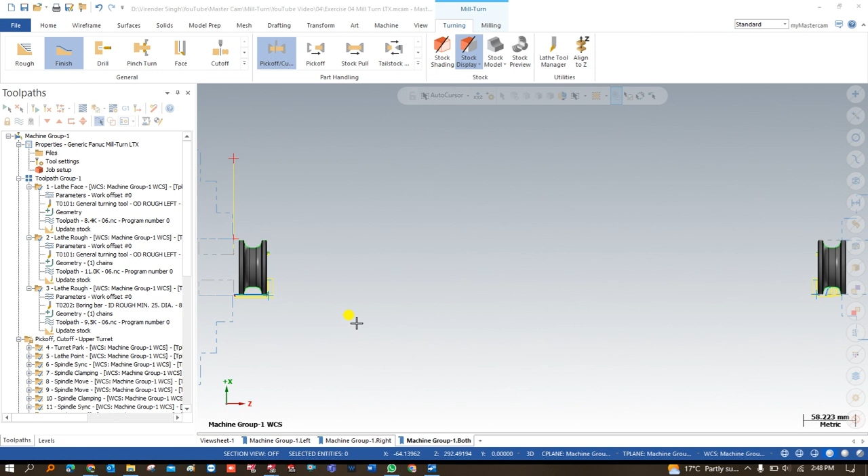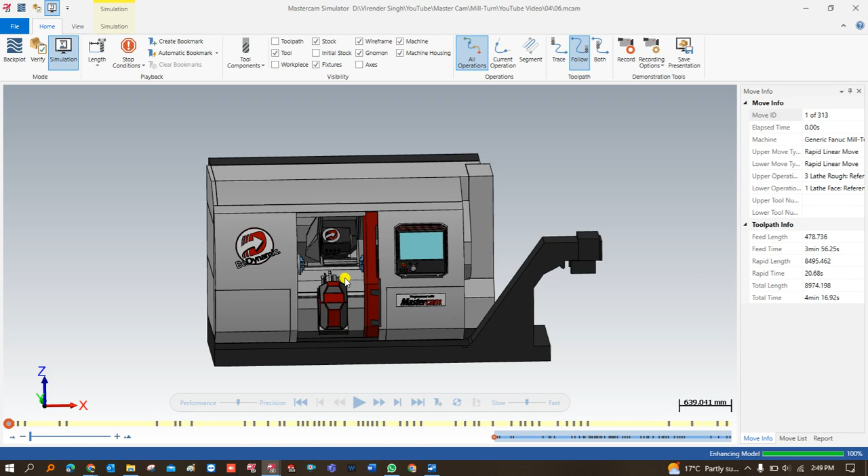The previous three videos covered the basic concepts of mill turn, and this video is a complete concept of mill turn - how the two spindles work together, how the upper stream and lower stream work, how my upper milling head works, and how my lower turret works on the lower left hand and right hand spindles. We'll get a detailed idea about all these things. First, thank you so much for watching, and I hope you guys learn a lot from this.

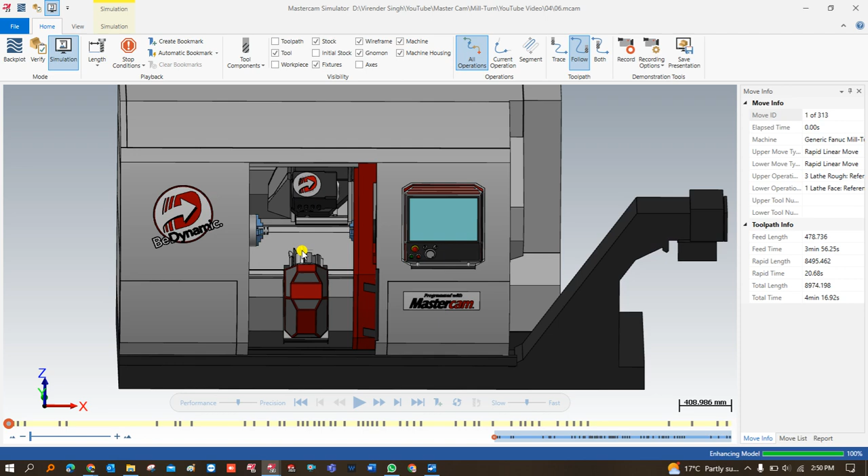If a person wants a very good salary in India, or in any country, you can get a very good salary with this skill. The reason is that mill turn machines are available a lot in the market, but very few programmers are available today in the Indian market or anywhere in the world. So if you have good knowledge of mill turn, you can easily get a very good salary, up to 1 lakh or 2 lakh in India.

So we have to start with what is the concept of this machine and how we can create the toolpath. First, I would like to show you the tool model of this one component. As you can see here, this is my model. It has a chamfer on the outside and inside of both areas, and it has a grooving.

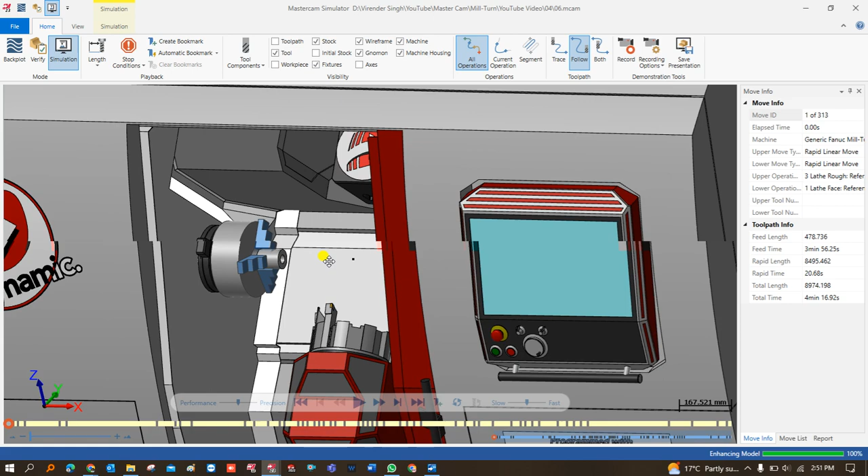For creating this one component, there is no milling toolpath we will cover right now, but we will create a turning toolpath with the help of the upper stream and the lower stream. We will create a turning toolpath on the left side as well as the right side. One new thing we'll get an idea about is how we can make the part transfer from the left hand spindle to the right hand spindle with the help of a cutoff, and the important concepts to keep in mind when doing these kinds of things.

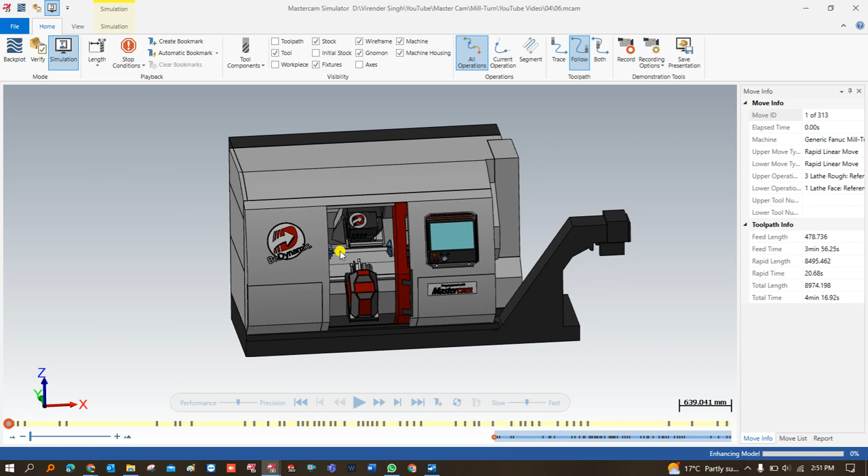As I always tell you, in mill turn, machine simulation is very important for every single video. So before learning how the toolpath can be created, I would like to show you the machine simulation, so you guys can get understanding and a good idea about how my toolpaths and operation sequence are going to work.

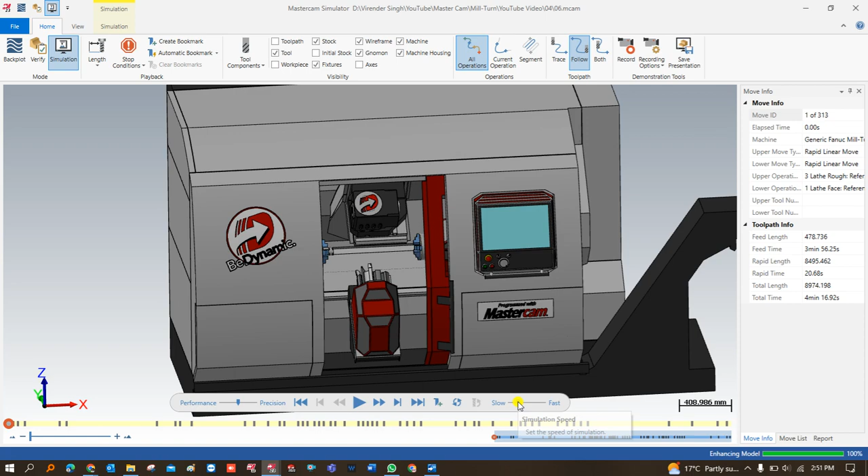First, I would like to reduce my speed a little bit and just play. As you can see here, this is a double spindle double stream machine - it has an upper stream and a lower stream. The first operation I make is a facing operation with the help of the lower stream, and that machine is called LTX.

What is the reason behind that LTX? It means the lower turret can be rotated in X direction. LTX means lower turret, X means it can be rotated in X axis. So that's the reason this machine name is LTX.

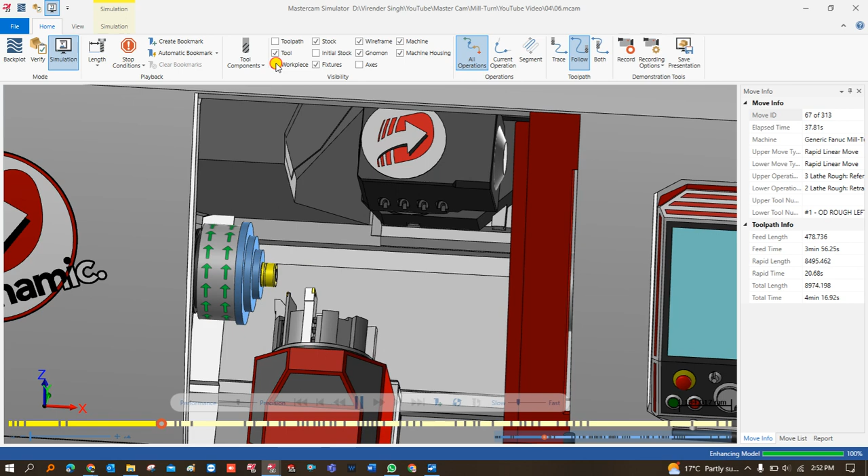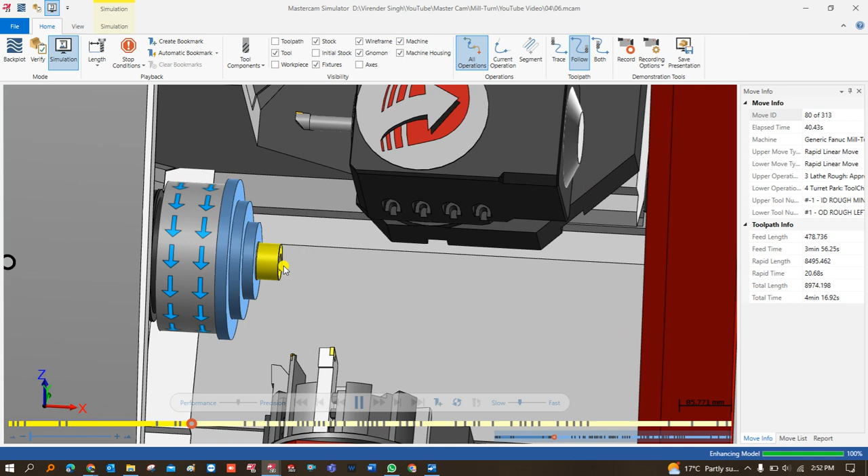So first I make operations like facing as well as turning, and after that I make a new toolpath with the help of upper stream, and that toolpath will perform on this left hand spindle for ID boring. So you guys get understanding about how we can create a turning toolpath like a boring operation on these kind of mill turn machine.

So as you can see here, have a look. That's a complete operation going to be performed right here. So we have successfully completed OD operations as well as the ID operations. Now have a look, 3 operations are successfully done.

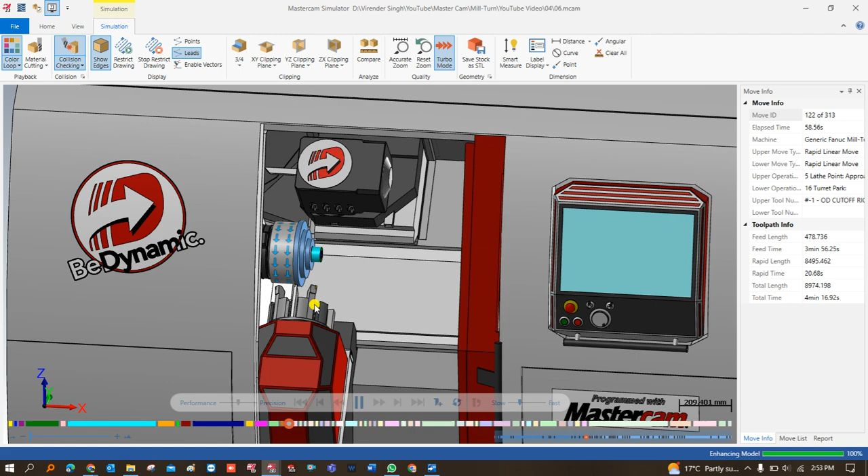After completing all these 3 operations, as you can see here, now my part transfer has to start processing. So both upper and lower stream are going to be referenced on the left side, and now the part is going to be parted in this condition.

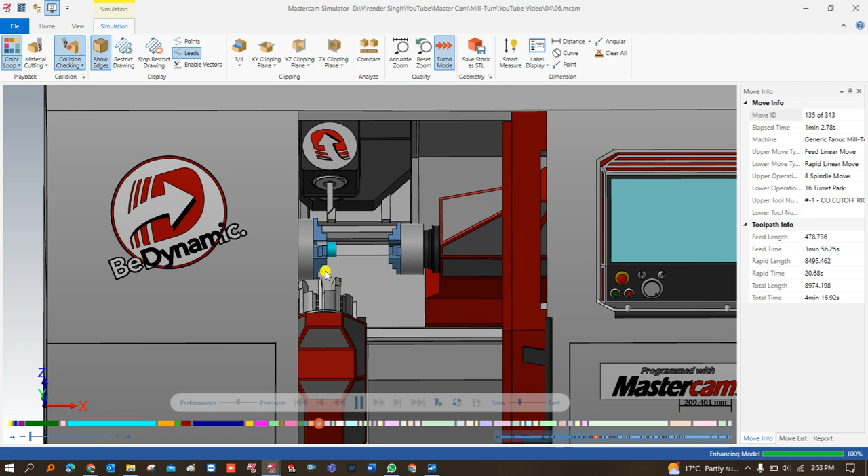As you can see here, my parting tool is called from the upper stream, and once my parting tool takes proper position, what happens is my right hand spindle will come near and hold the workpiece, and after that my parting process will start. Have a look, it holds the workpiece, parting process starts.

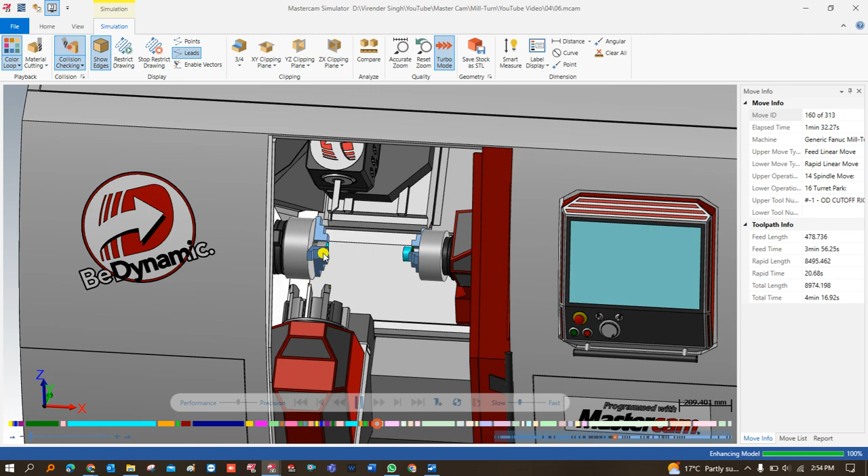Once parting is done, the tool goes to upper position, the right hand spindle holds the workpiece and takes it to its initial position. That's the beauty of mill turn. Each and every single process, each and every single step, you can watch carefully in a very good way. That's the beauty of mill turn.

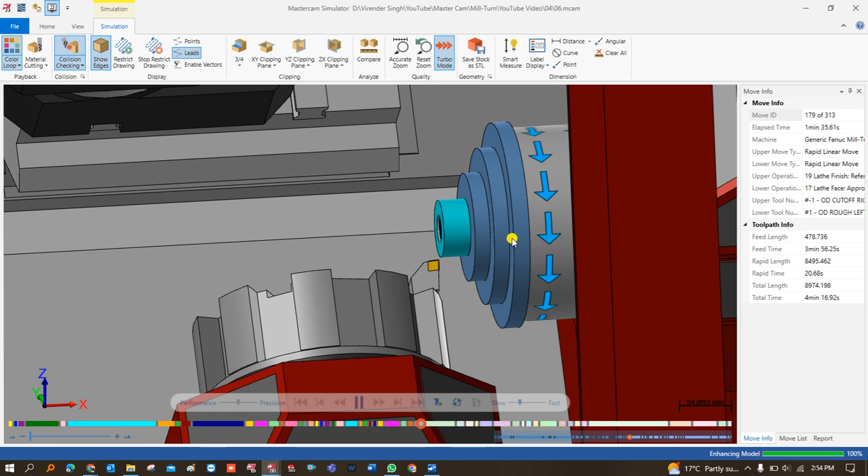As you can see here, my first parting operation is successfully completed. After completion of the parting operation, again my lower and upper turret go to the center reference position. Once it takes the center reference position, I would like to call my next toolpath, on the right hand spindle with the help of lower stream.

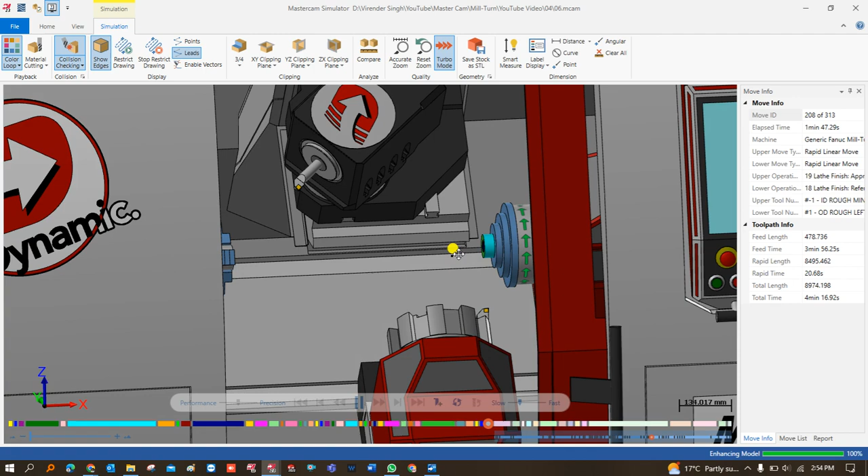That first operation is called facing. Once my facing operation is successfully done, I have to call another toolpath with the help of upper stream, a finishing toolpath, or I can say an ID chamfer toolpath.

Have a look, so that's successfully done with the help of a boring bar. How the tool comes in, how the tool tilts, how my milling head tilts, all these things you can watch very carefully right here.

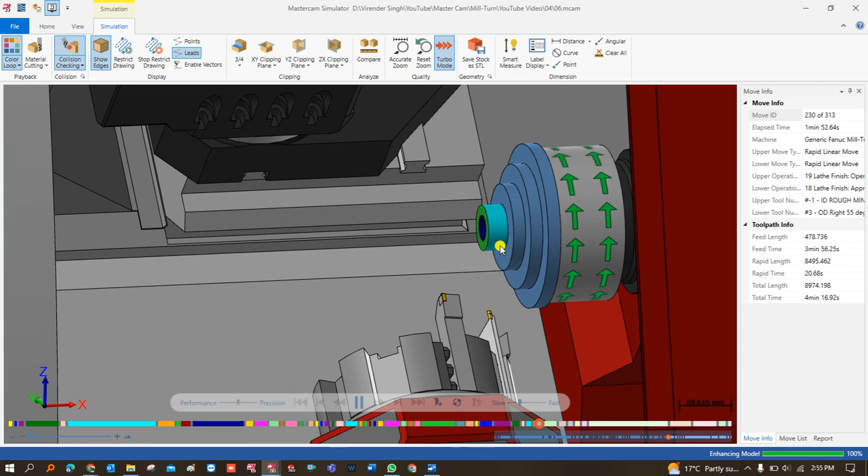That's the best benefit if you want to learn mill turn. That's the best concept in Mastercam. Once that's successfully done, I would like to show you another toolpath, called a grooving toolpath. Have a look, that's successfully done, a grooving toolpath.

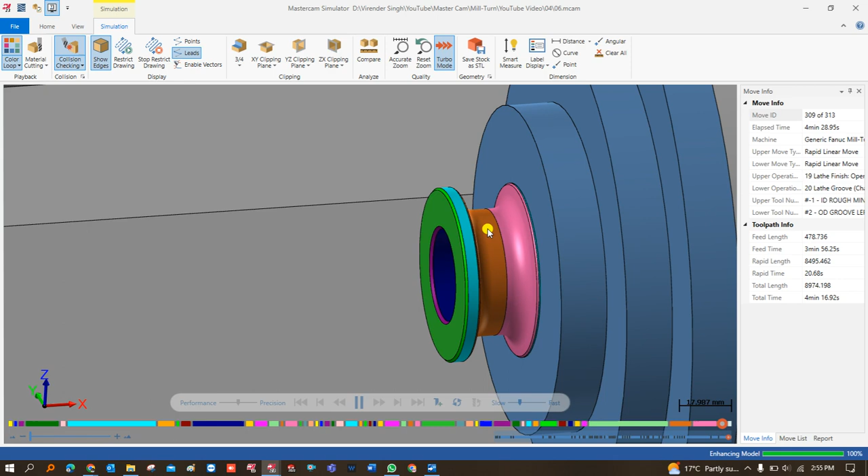Have a look, as you can see here, all my toolpaths are successfully completed, and after completion of all these toolpaths, this is my component which I created successfully as per the model. All these things are perfect as per need.